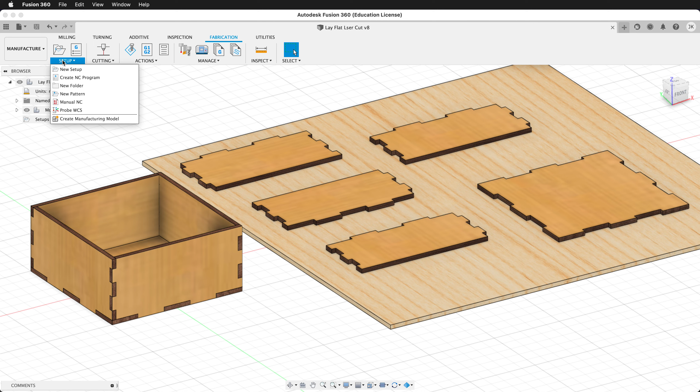Once you have your pieces all laid out flat, you can go to the manufacture workspace. There, we need to create a new setup, so click Setup, New Setup. For the type of setup, we want to select cutting. It will default to milling, but make sure you select cutting.

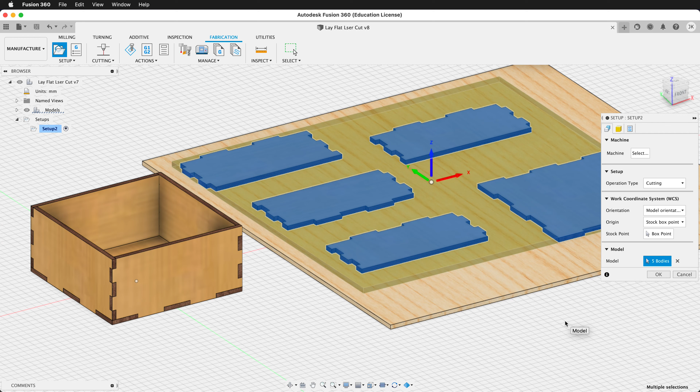Then we can select the pieces of our model. Once you select all the pieces, it will make a relative stock size. This is fine for laser cutting. If you need to have a specific stock size for your application, you can set it now.

Now we have our setup created. We need to create a new cutting action, and we want to create a 2D profile. First, select the tool—this is the key to having the kerf automatically added. You can create a laser cutter tool that has the specific kerf for your laser cutter. I've created one for mine, and I've shown in a video how to do this before.

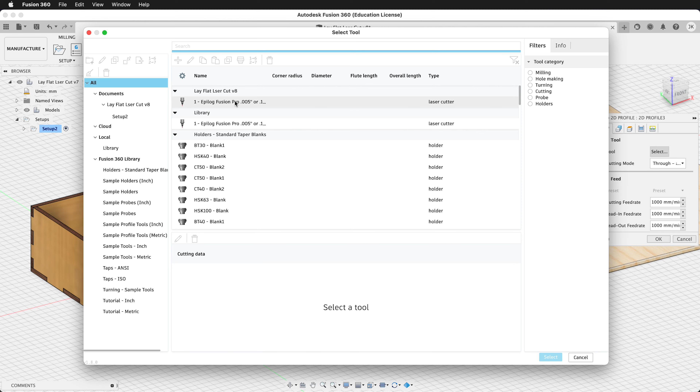You can make any generic laser cutter and just look at the spec sheet of your laser cutter and put in the kerf for the laser size. You can also make test cuts to find out what size laser you need.

Once we have this set up, now I can select the geometry. It's as simple as clicking the top faces of each of the pieces that I want to cut out. Then I need to select passes—this is the important part that does the kerf compensation.

So you want to click left or right. If you want to be on the center line, for example, cutting living hinges or etching, you can click center. But make sure you click left or right if you want kerf to be there.

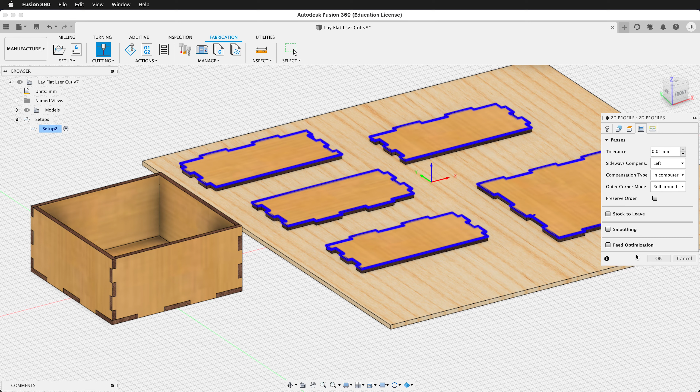And then for compensation type, we're not sending it directly to our laser cutter, so we want to calculate this in the computer. Once all that is done, you can press OK, and it will calculate these toolpaths.

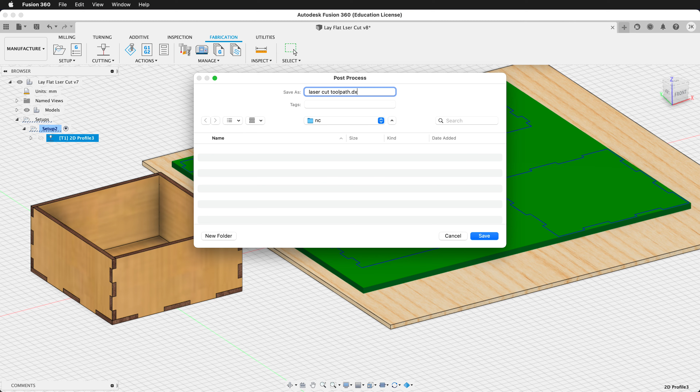When they're finished calculating, you can export them as a post process. To do that as a DXF file, we'll click Post Processes, then in our personal posts, select the AutoCAD DXF, press OK. We'll label this file, and many times it won't add the DXF extension, so go ahead and add it. Click Save, and now we have that DXF file that we can edit in a vector program to set up the correct line weights.

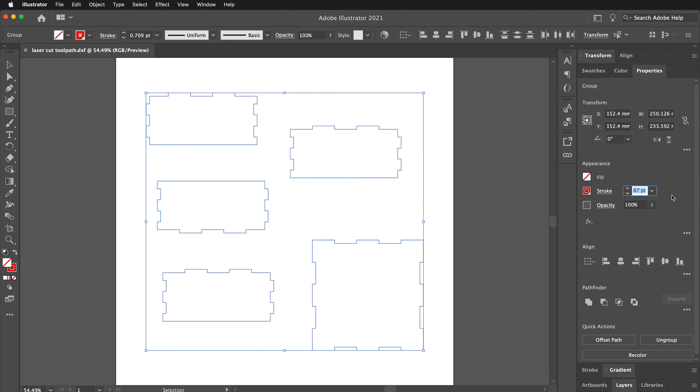When I open this up in Illustrator, I want to make sure that I have the document unit set to millimeters, because that's what I used in Fusion. For an Epilog laser cutter, we need these to be 0.001 line weight, or hairline. You can change that simply, then resave the file and use it for cutting on your laser cutter.

So this is a simple way to have kerfs automatically added to your laser cut toolpaths.